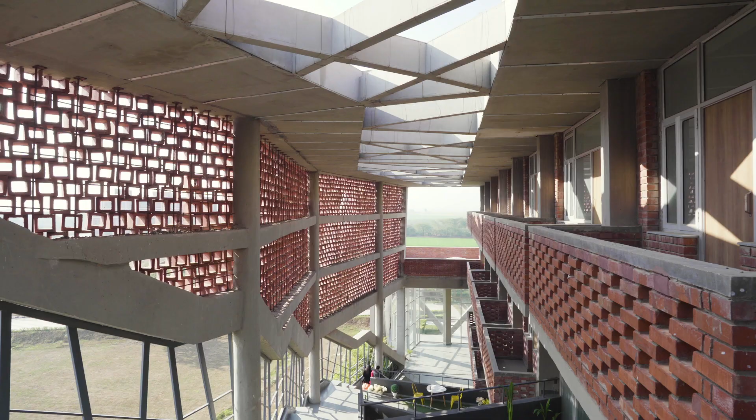When we are building in a composite zone, one needs to understand the climatic context, the diversity in the overall area with respect to temperature, with respect to microclimate, with respect to the materials with which you can build, and most of all, you need to respect the budget of the client.

Okay, the site is probably 3 kilometers from Faruknagar, which is a small village. It is very, very popular because Britishers used to extract a lot of salt from here. So the soil over here is pretty bad with respect to landscape and with respect to construction also.

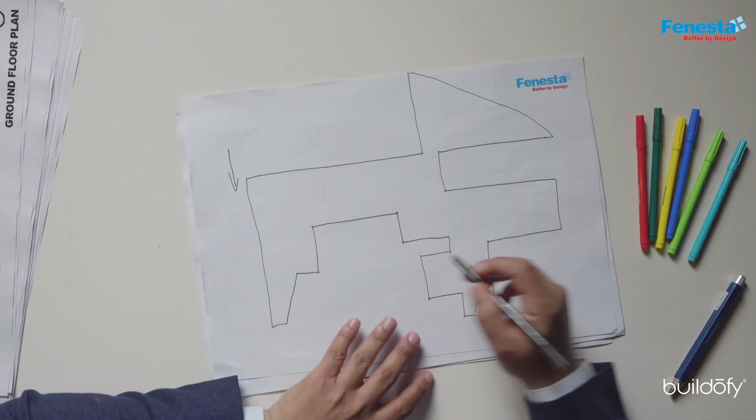For the boys' one, they were looking to accommodate 300 students in a very linear block, which was given in the master plan. And in the girls' hostel, we have to provide accommodation for 120 girls. The boys' hostel was pretty much open and approachable by all at all times. The girls' hostel was supposed to be a site within a site kind of a situation wherein security was the primary concern.

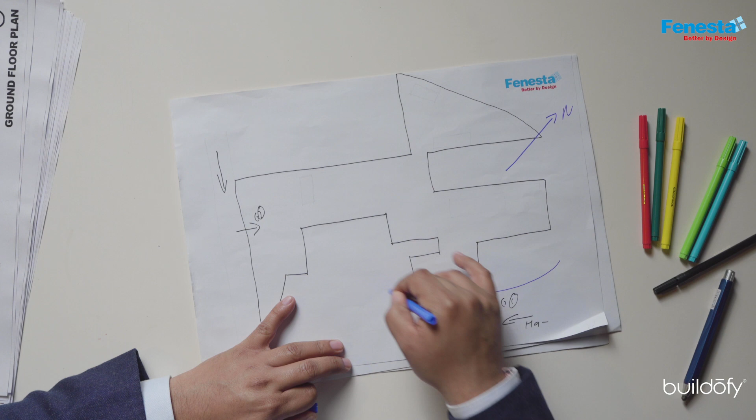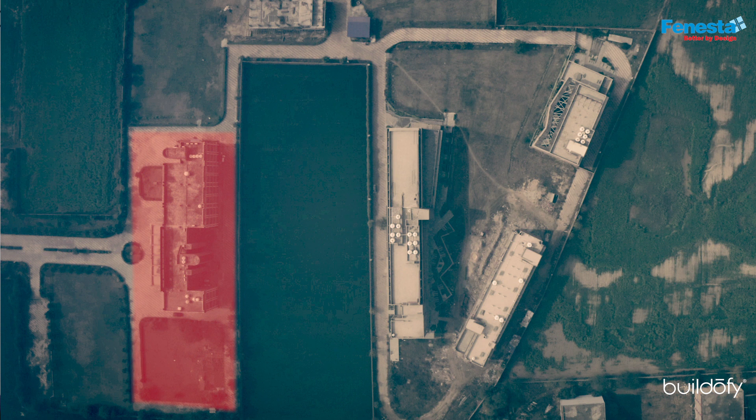So there are predominantly two entries to the site. It's a pretty odd shaped site. The north of the site is slightly angled like that, and that's the predominant sun path. They have already built block number 1, which is their first academic block, which is 50,000 square feet of built up area, and then block number 2, which is having 40,000 square feet of area.

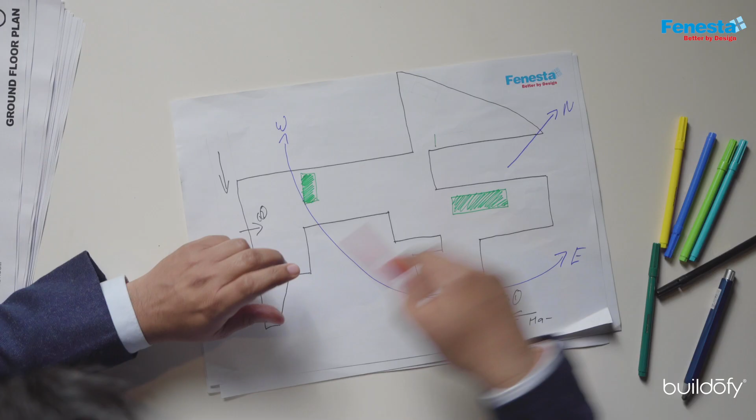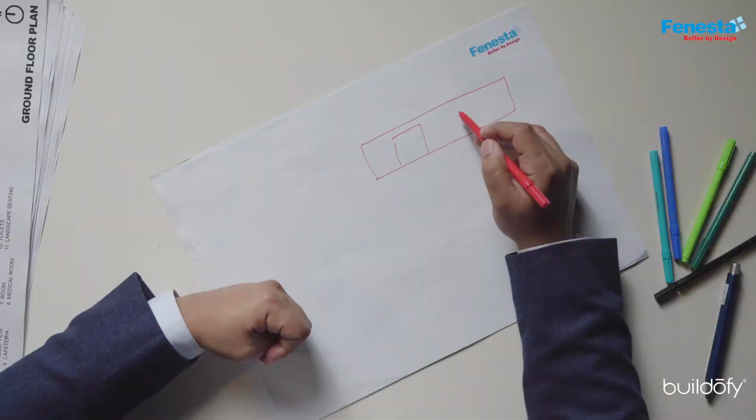And in the given master plan, they had defined this linear block over here as the first given location for the boys' hostel, and this linear block over here as a given location for the girls' hostel. The width of the building was not much, so it was very, very difficult to build in courtyards or larger volume cutouts because it really left us with no space, and the building height was also restricted because they didn't want it to cross the 15-meter height limit.

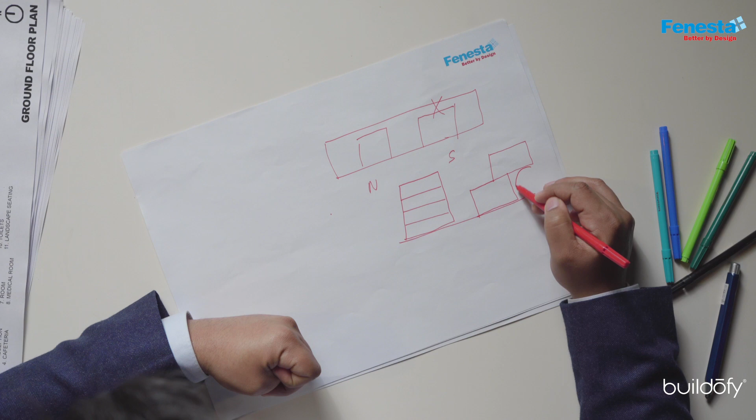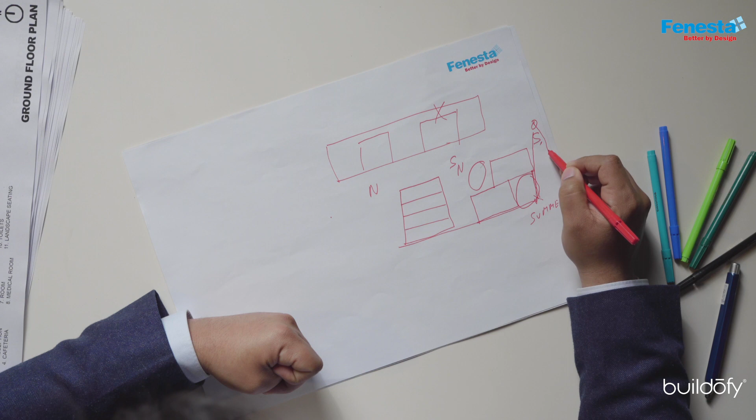So in the boys' hostel, instead of a given linear block which was split into 4 levels, we twisted the block in the front, and that twist created 2 very interesting spaces. The one facing south, we call it the summer court, as it provides you the required shade during the peak hot afternoon in summers. The sun angle is pretty high, and in winters the sun angle becomes low, and it is a very pleasant space to enjoy the winter sun as well.

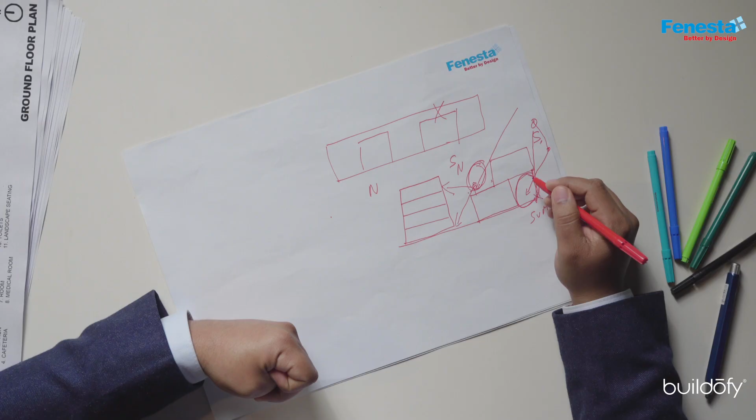Whereas the terrace on the north gives you some solar exposure during the winter from the south sun because of the depth of the terrace, as well as during the evenings it's a very pleasant space to look out into the central lawn. It also starts creating shade on the facade, whereas the girls' hostel was close to the boundary wall, and there is others' property on the other side from where there was a threat of overlooking privacy and also somebody trespassing and creating nuisances.

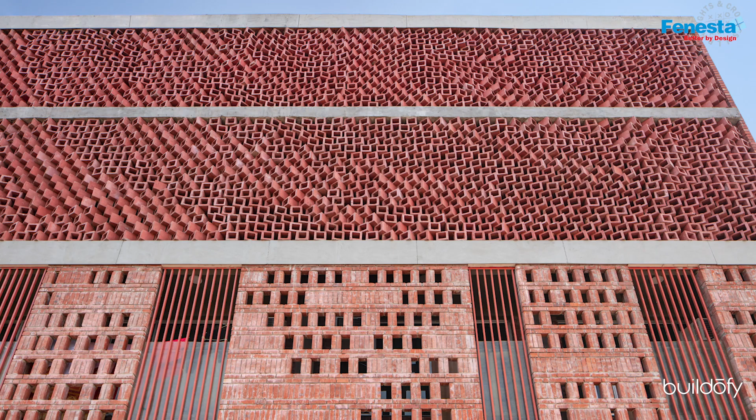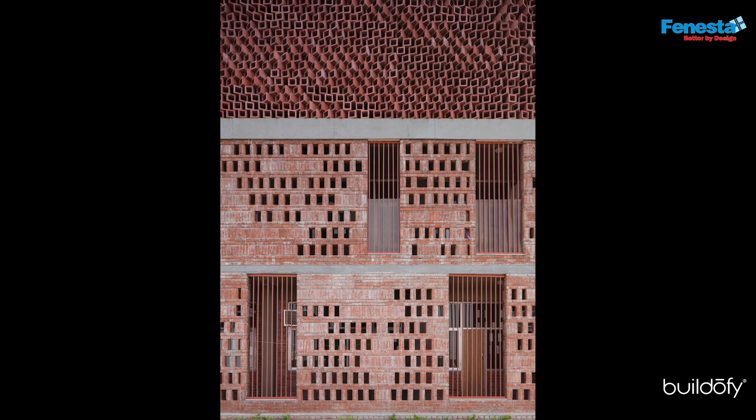We split the building into 4. On the north, we built balconies wherein we then started putting the screen. Firstly, it was giving you the sense of privacy from the neighbors. And the second thing was that it saves you and protects you from the diffuse radiation and the convective and conductive gain from the air temperature outside.

On the south, we created a court which was enclosed by an outer envelope skin, which was again a jali, a permeable jali, which gives you a glimpse of the campus outside. So it doesn't look like a boxed-in situation all in all. But when you look from outside to inside, it blocks the view towards the girls' hostel.

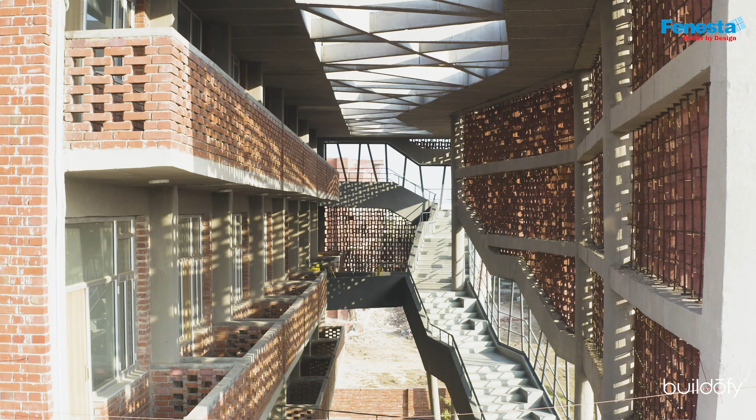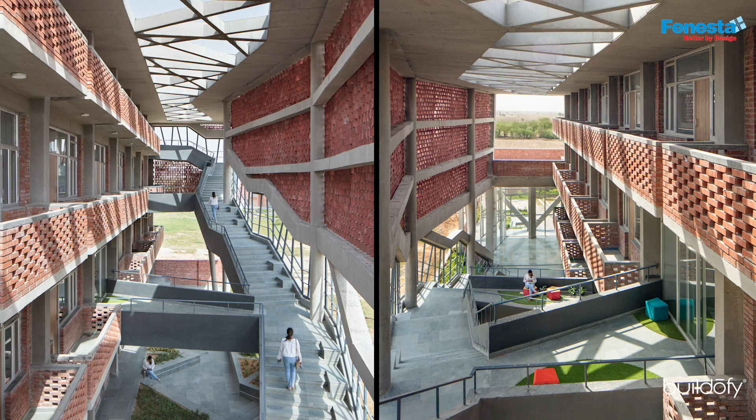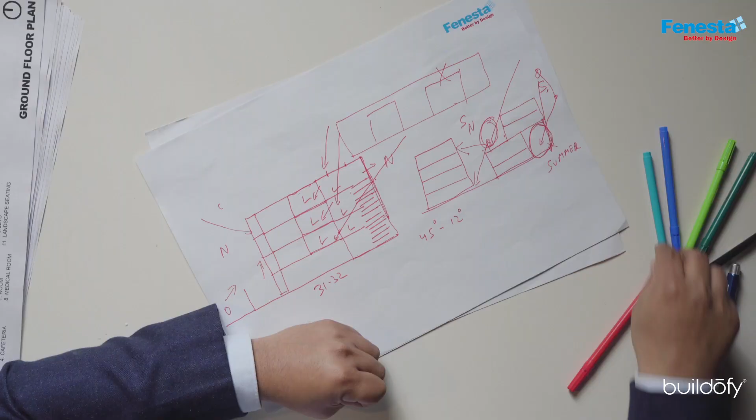In the courtyard, then we thought that we will house one of the fire escapes, which remains an unusable space throughout the year, and create that into a social space which connects terraces and internal lounges on multiple levels. This was shaded from the top from the summer sun, but through this permeable skin, the winter sun penetrates deeper and it actually warms up your room very nicely during winter. So we designed a transitional space in between the inside and the outside on both the edges of the building.

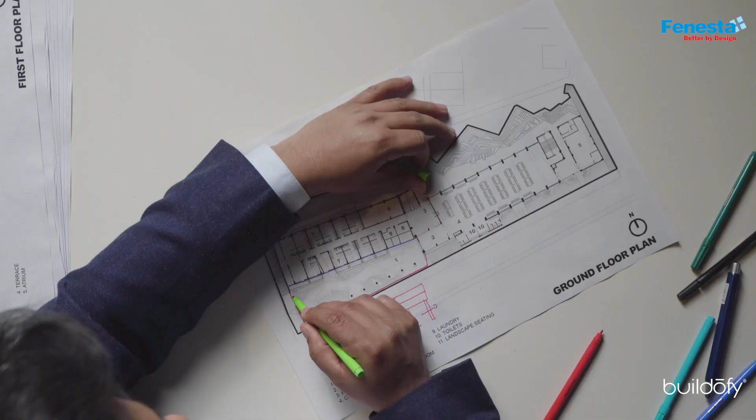In case of boys hostel, we split the mass to create an entrance foyer, which is a beautiful transition space which you see over here. It was then heavily planted to create a very favorable microclimate for outdoor interactions. We designed the edge of the planter to become the seating itself. This space was given to a coffee shop and a stationery shop as well.

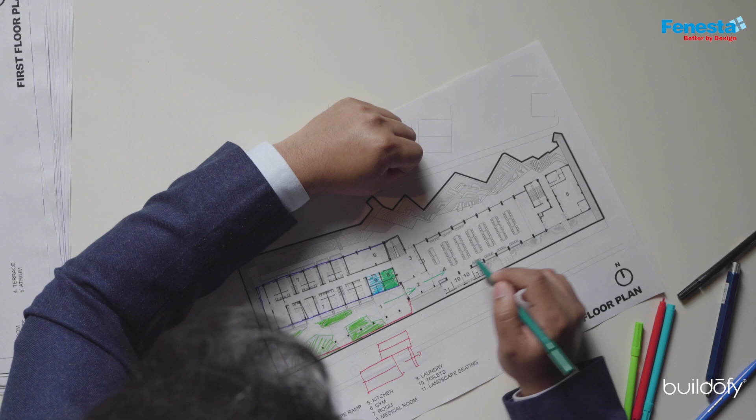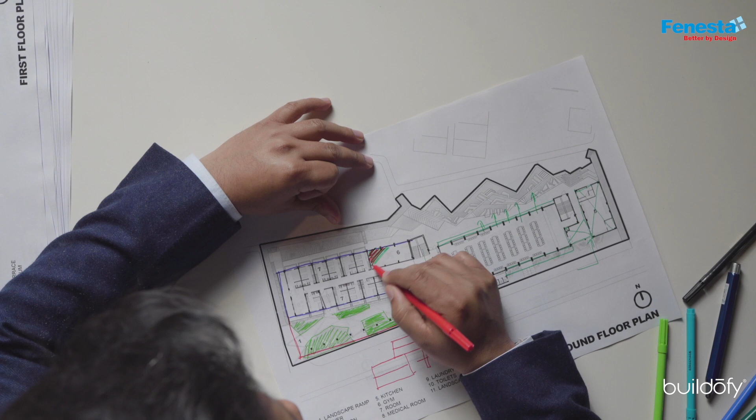Once you enter into the building, you enter into a lobby from where you can enter into a common mess, which can accommodate up to 150 students at one time, having a kitchen yard on the back and a main kitchen. On the south, we did a deep overhang to protect the glazing, and on the north, we created a beautiful landscape space where students can then spill out into this, which increased the capacity of the mess to take in more students. We also have the gymnasium, which is not really accessed from inside but from outside, so that it can be used both by girls and the boys.

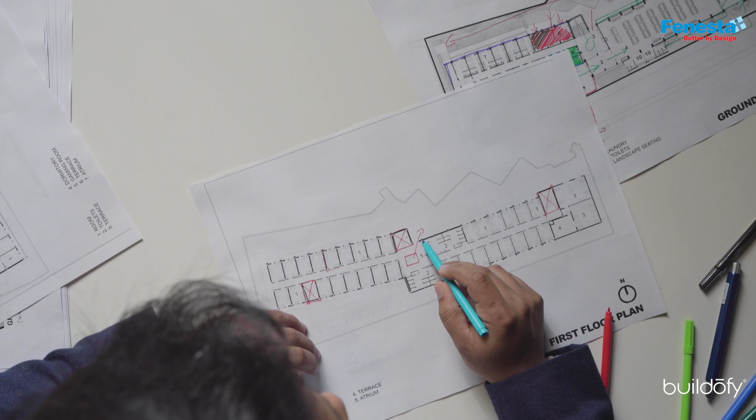So this is a linear landscape which is creating a continuous plaza where all the social spaces spill out into. Then on the left hand side, we have double occupancy rooms with attached washrooms. As we move up, there were three essential staircases. Right in the center, we then created an atrium. Here on this floor, you have triple occupancy rooms all along on the left hand side and the right hand side. And right in the center, along the core, we have a shared washroom area.

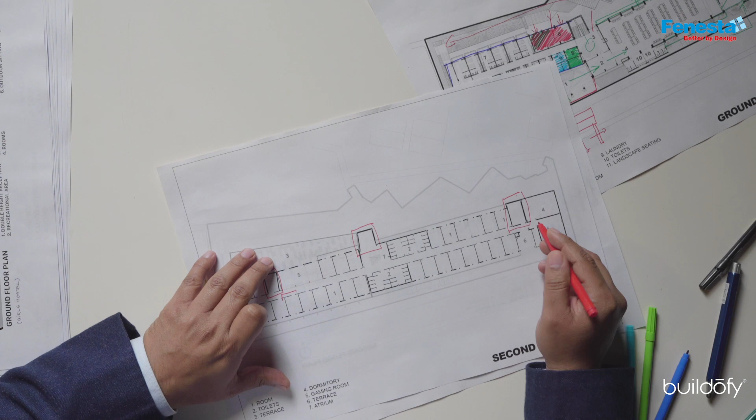At the eastern end of this linear block, dormitories were designed to give more life to this space. A triple height terrace was designed so that they can come out and have a spill out zone of their own. On the second floor, again we have three staircases. We have the dorms on the right extreme end along with their terrace court. The atrium keeps on twisting. As you go on the left wing, we then created a beautiful terrace garden having a very nice view of the central lawn. The third floor is a repetition of what's happening on the second floor.

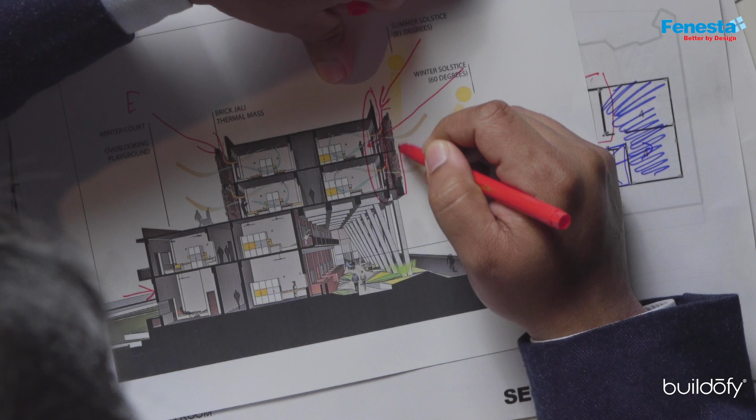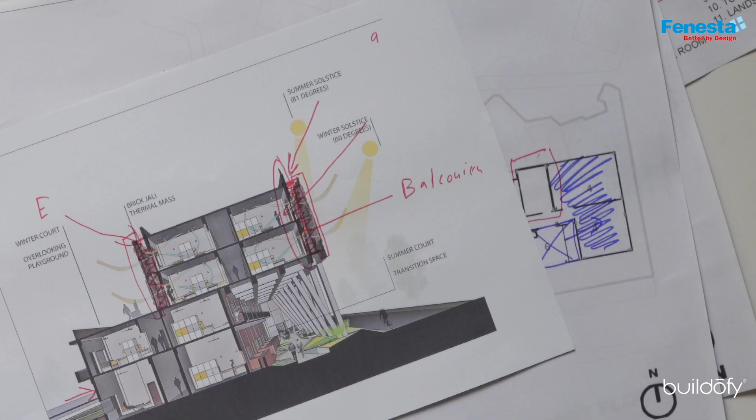In section, the twisted block on the lower floor, because of its twisted angle, was not receiving any more radiation from the west. We planned a skin, like a blanketed skin, in front of the south and the north facade both, to reduce direct and diffuse radiation. This helps in creating a small transition space on the south and the north, wherein we then housed balconies. So all the rooms in the building were having a balcony which was either opening into the court, which you can see here in the section, or opening into this blanketed facade.

This helps us in reducing the temperature from outside 45 degrees to inside 32 to 33 degrees. And with the ceiling fan on, increasing the thermal comfort zone, we can easily feel like 31 degrees indoors. And that decreased the need of air conditioning in this building altogether.

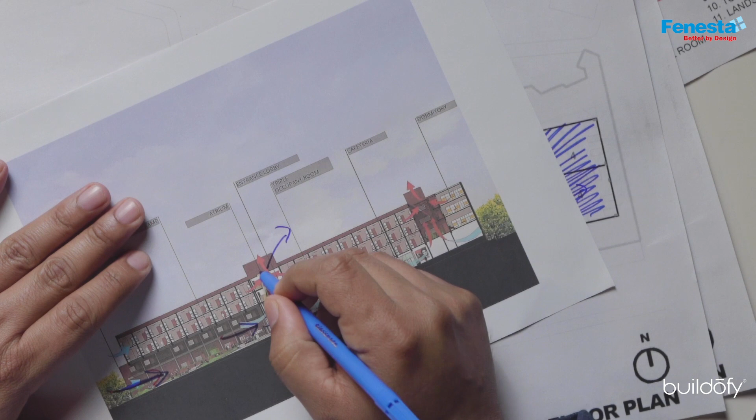In the linear section, the cool air which comes from the courtyard is exposed to the greens and the shaded thermal mass at all times, which cools down the air. And then the cool air enters into the building, and through the atrium it rises up and the hot air then escapes out. That happens in the center of the building and on the other side where the terrace is given next to the dorms. And there is diffuse daylight coming in all parts of the building, so all the corridors were kept daylit at all times.

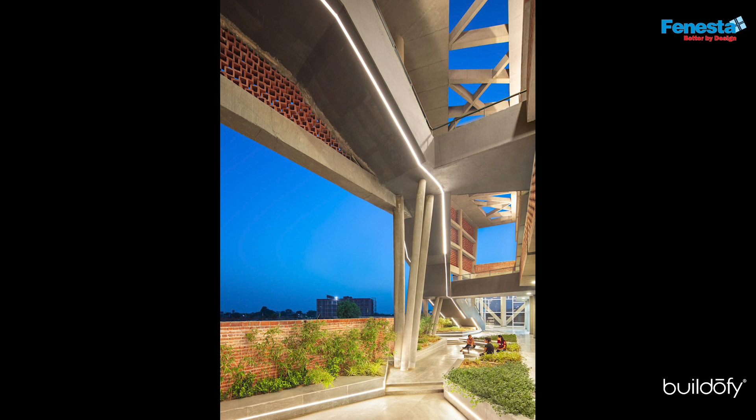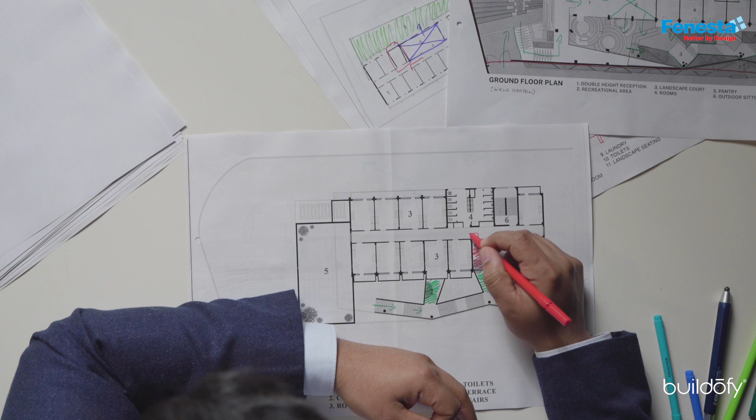On the ground floor, internally you have 2-bedroom rooms with attached washroom space, having the balconies attached to them. As we move up through the staircase, we get these terraces, which are semi-outdoor lounges, which are connected with the internal or indoor lounges. And from there, you actually access a central corridor, which then feeds into the triple sharing rooms with a common washroom right in the center of the building. The staircase was a very, very important element. It offers a very dynamic transitional space, a social hub, I would say, which connects students on all floors with each other.

We use exposed brickwork as the facade material. It acts as a permanent finish, which doesn't need to be plastered or painted. The second thing was that it is a very effective thermal mass, which has a very, very long life as well. We then wrote a script wherein initially insolation analysis was done on the primary facade, and the input points were then fed into Grasshopper, which gave us the rotation angle to achieve shade all throughout the summer and allow solar penetration during the winters.

The biggest problem was how to build this, because it gives us bricks which were rotating in all angles. So we couldn't use the mortar because the overlapping surface between the two bricks was pretty less. So we got this custom-made brick made for this site with a single hole, which can actually take a reinforcement bar of 25 mm.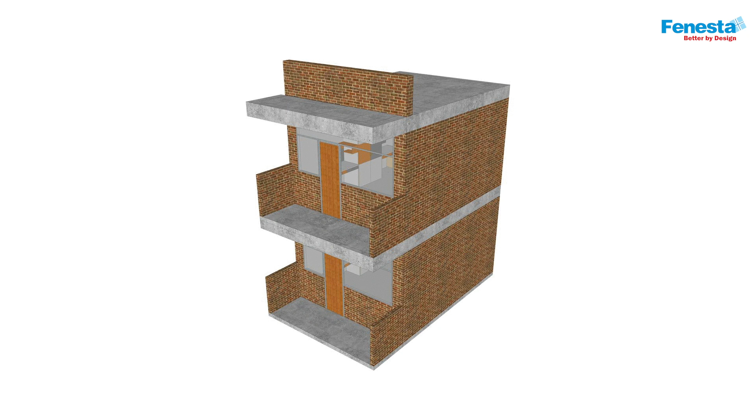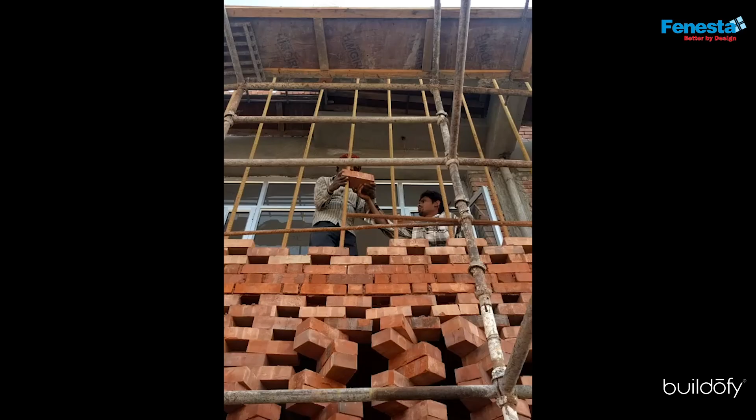We put the bar first into the beam using a Hilti chemical fastener, and then we started laying the bricks right from the top, 20 feet high, till the base, and then it gives us a free opportunity to rotate the brick because you have an axis, and also the bar acts as a very strong binding member between all the bricks.

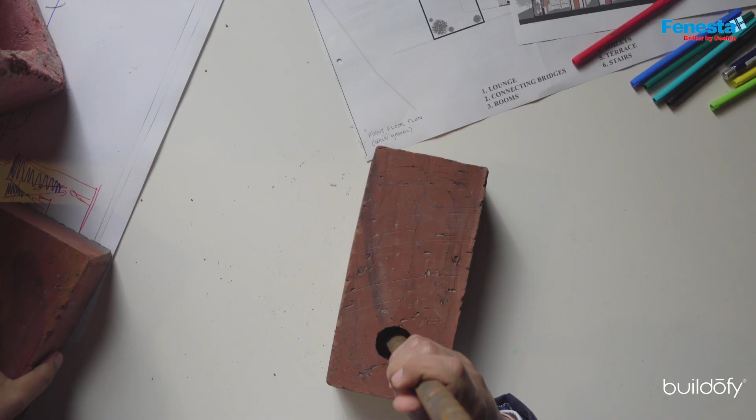So there is no mortar used in constructing the brick facade of the boys' hostel, which spans 25 feet in height and 250 feet in length, one of the biggest brick jalis ever made in Asia, using no cement mortar at all.

So we realized that because of the vertical insertion of the brick, the horizontal blockage of solar radiation was not possible. So there were some solar radiations which were able to penetrate through. So it was not 100% effective. The second thing was that we needed a way in which this facade can be built, which increased the overall budget of the project as well. The third thing was that it was not able to control the air movement from the facade as well, and the view out opportunity from this facade was also pretty limited.

Then in the girls' hostel, we thought of using these 8-inch by 8-inch by 8-inch terracotta blocks. They also act as very effective thermal mass because they are solid on all four sides. It gives you a better opportunity to look out because of the larger openings in the mass. And we started laying them one on top of each other. We didn't actually need a reinforcement bar because they have enough surface area. So we used a chemical bond to fix one on top of each other.

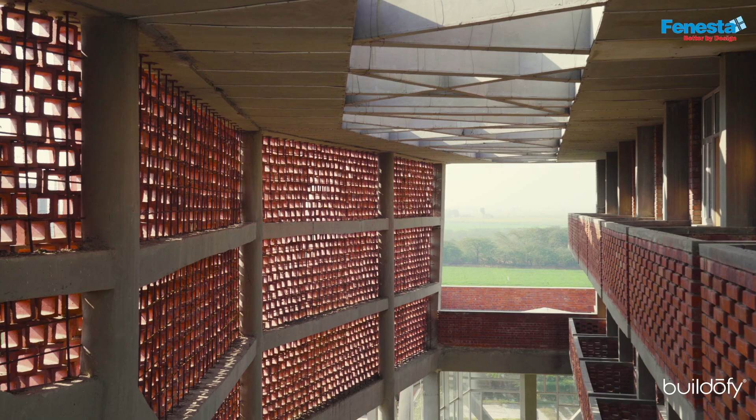When the air comes in from the outside, it gets compressed, and because it gets compressed and is exposed to this mass which is shaded at all times, the air temperature reduces, and hence you get cool air on the other side of this module.

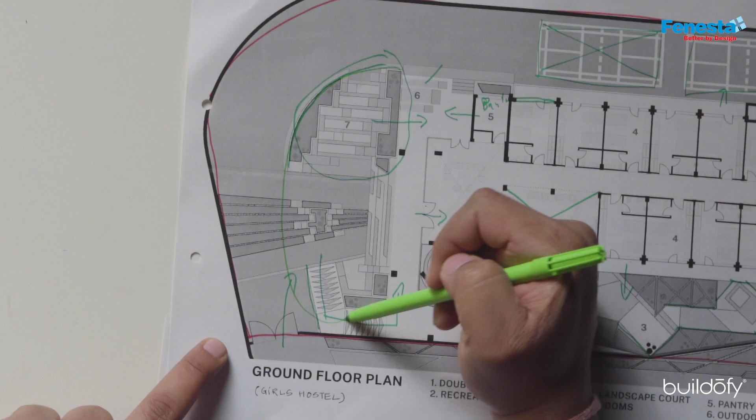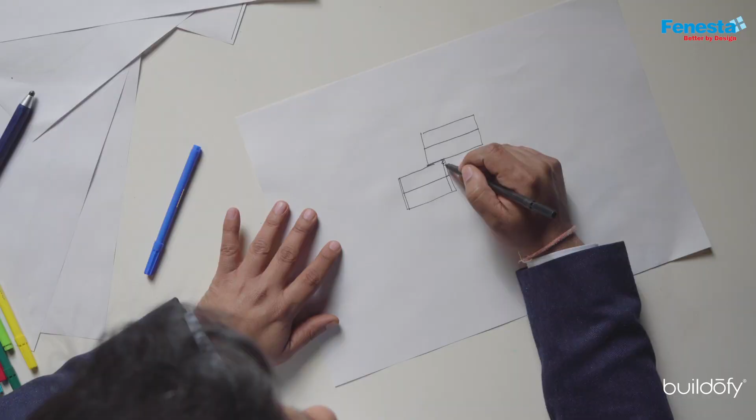In the boys' hostel, when we twist the lower block and the upper block, structurally it becomes a very big challenge because the vertical columns from the lower block, we couldn't take them up. We then started building these V-shaped columns to reduce the span and the depth of the transfer girder beam. From there on, we started taking the floating columns, which helps in constructing the upper 2 stories.

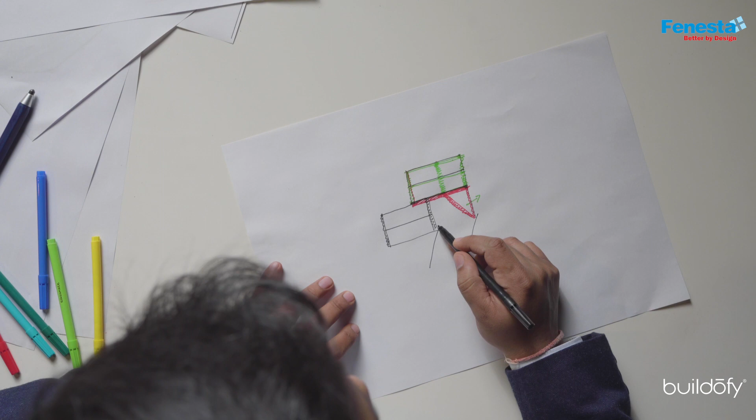This V-shaped column was then used as a very important language, very effective in breaking away from the linearity and grid system look of the complete building, and we used that as an element for doing the landscaping in the court as well. So all the planters were derived from the similar system.

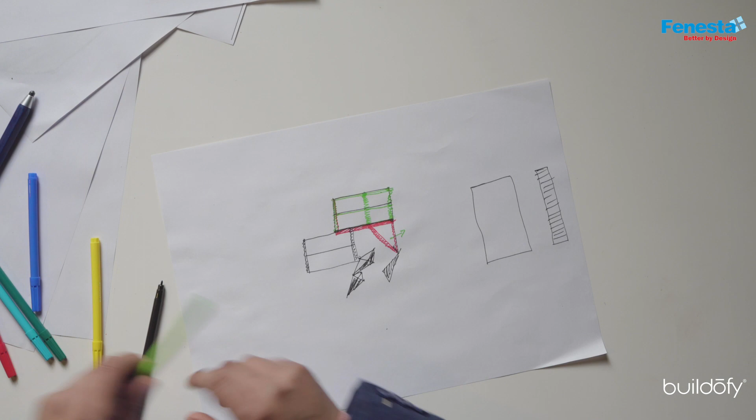Similarly, in the girls' hostel, we didn't want to build a linear staircase, so we actually started creating these twists and bends in the movement angles, which helps in creating a little more dynamic space with respect to the overall experience of the transition space, and also the aesthetics, which were way too different from the building. Once you're in the building, everything is pretty rigid, 90 degrees and straight.

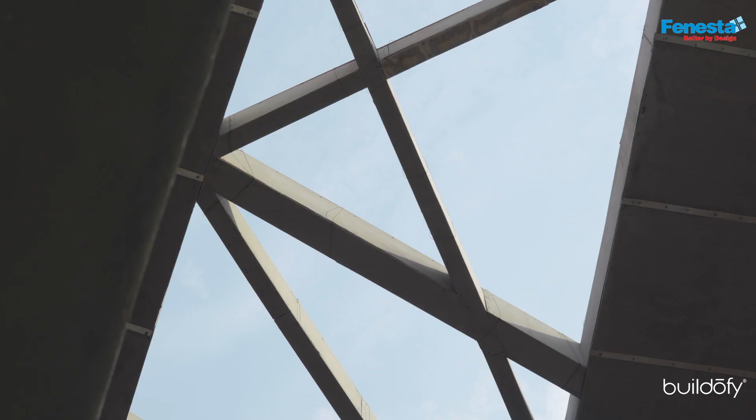Once you come out in the transition space, either in the boys' hostel or the girls' hostel, structurally the whole system changes. So within that tight budget, to create with the limited material palette a building which can offer much more than just being a linear box was the biggest challenge, which was pleasantly resolved in this case.